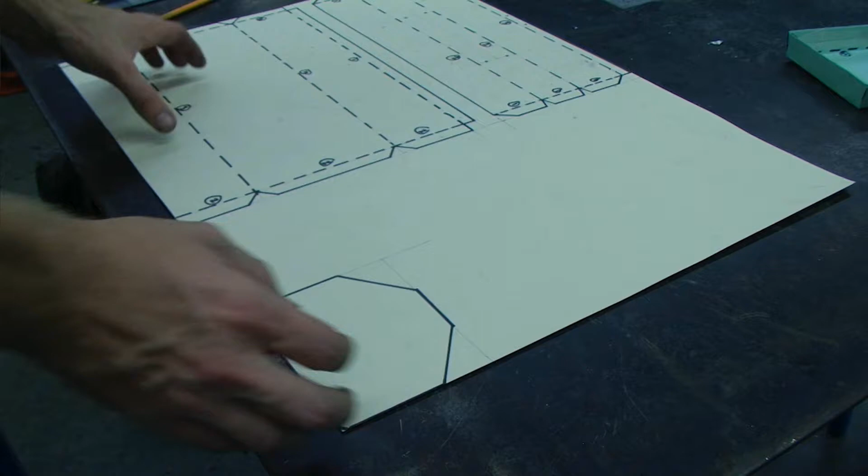In this video, we will be laying out all of the toolbox parts on paper.

If we take a look at the original drawing, we want to locate our overall dimensions for our box base first. My overall height is 10 3/4 inches, and my overall width is 1 foot 2.5 inches.

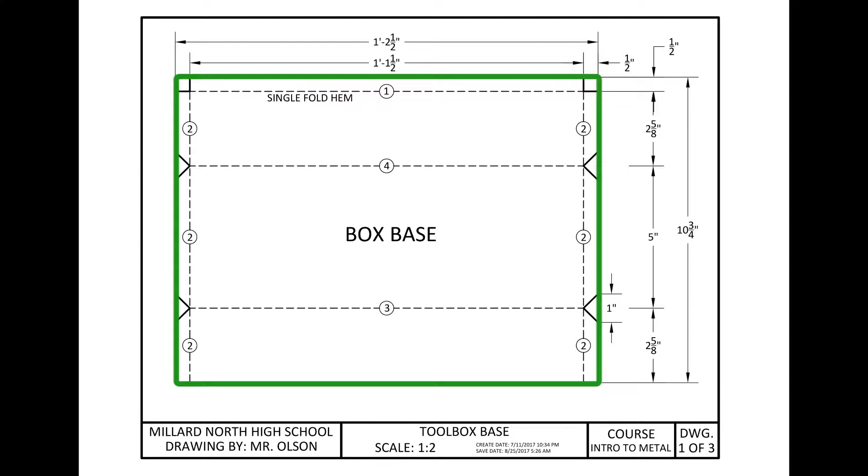So I'm going to start by creating some reference lines beginning at 1 foot 2.5 inches wide. I'm going to create one towards the bottom and another one towards the middle, then connect those together to create a reference line for the outside of my overall box.

Next, I'm going to create reference lines at 10 3/4 inches, which is the same measurement as our overall height for our toolbox, and connect those together also.

Now I'm just using pencil for this, and I'm using fairly light lines so I can go back and erase anything later.

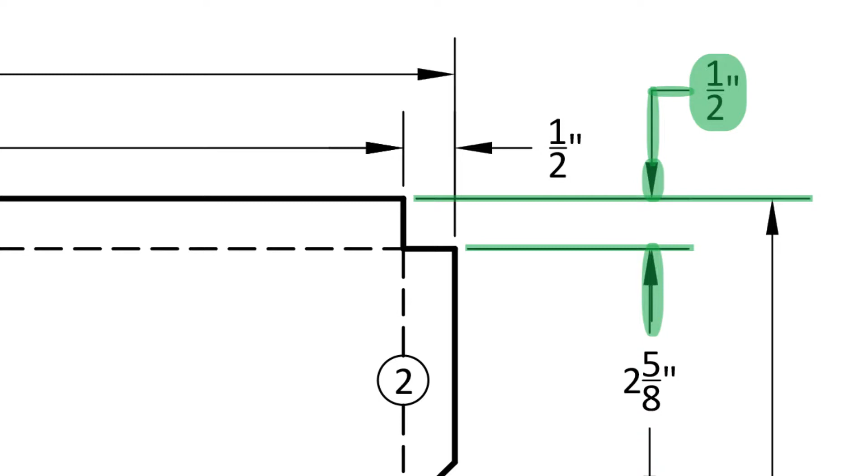The next line that I'm going to draw out is my first operational line. This is a dashed line, which means that there will be some type of operation performed on this line. It is 1/2 inch away from the top of our box base object.

So again, I'm going to place some reference points and then connect those together with a light pencil line.

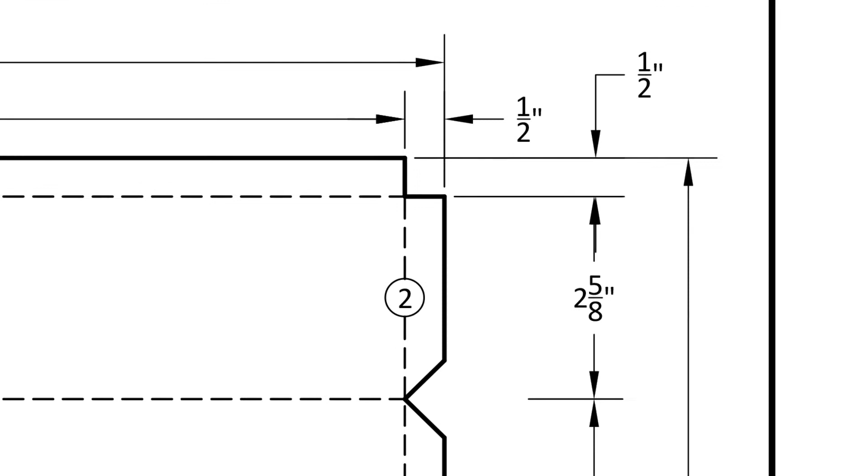After that, I'm going to be creating my number 2 operational line. This one is also 1/2 inch away from the edge of my object.

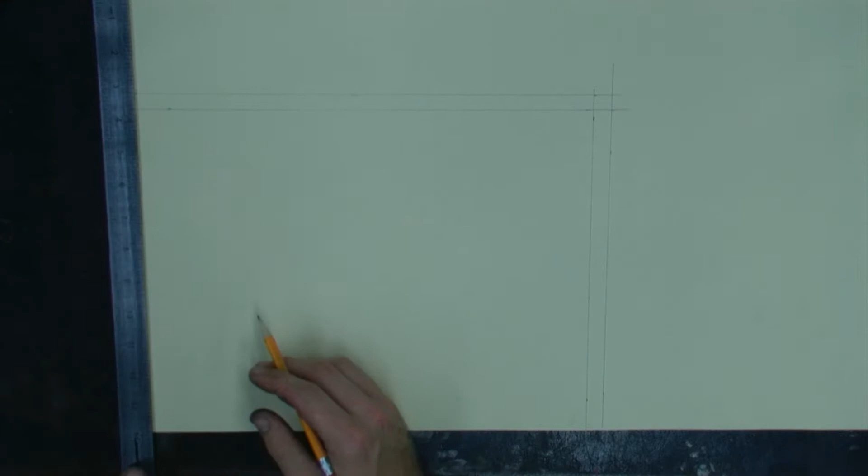After that, I'm going to lay out my number 3 operational line. This line is located 2 5/8 inches from the bottom of the drawing.

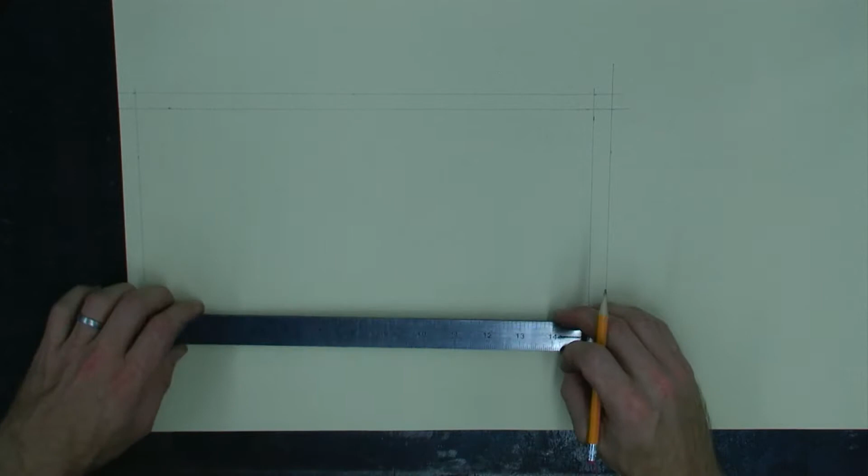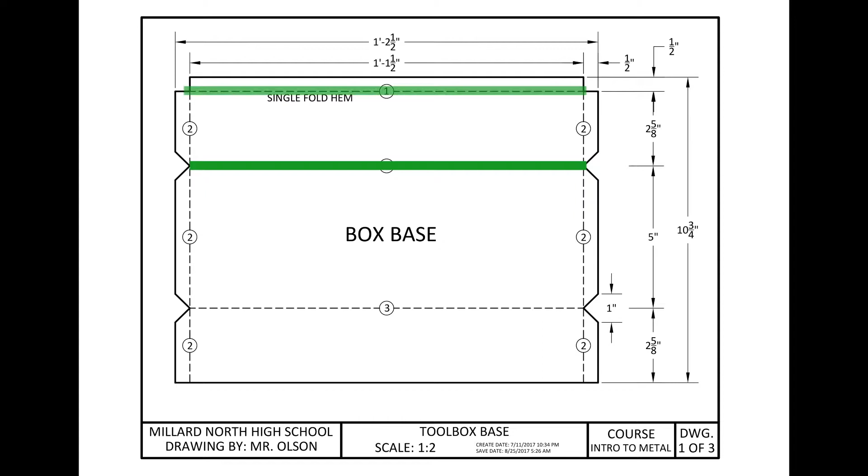Once that number 3 operational line has been laid out, I'm going to lay out my number 4 operational line. We can either base this line off of our number 3 line, and that distance is 5 inches away, or we could base this off of our number 1 line, which would be 2 5/8 inches away.

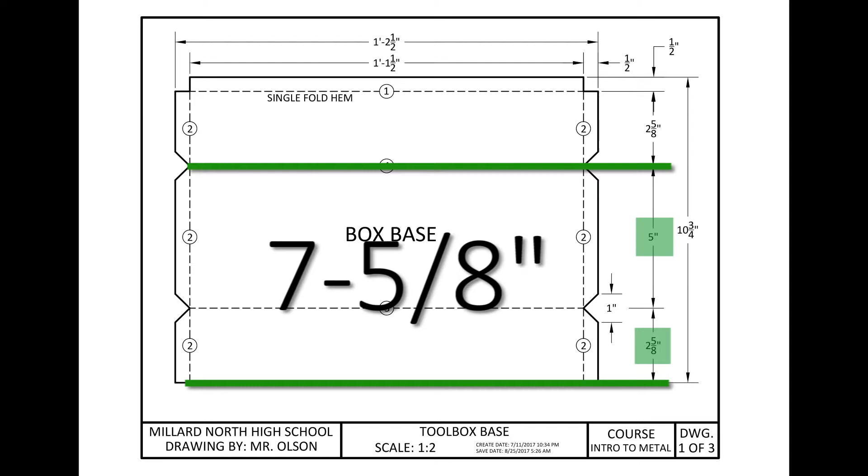So that I can be a little bit more accurate, I'm actually going to add together my 5 inch measurement and my 2 5/8 inch measurement from the bottom of my object. This will help me be a little bit more accurate rather than basing a measurement off of a previous line and hoping that previous line is drawn correctly. So by adding together these two measurements, I have 7 5/8, and that is referenced from the bottom edge of our drawing.

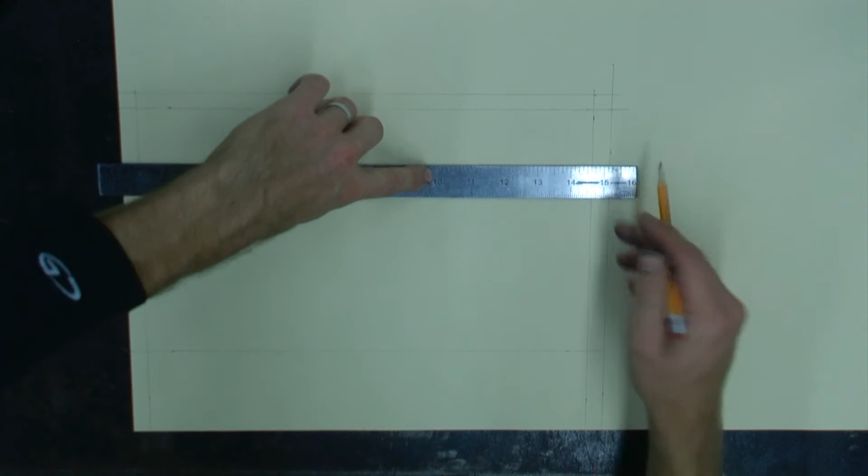And we can then go back and verify our other measurements that they are correct.

After that, I'm going to lay out my small notches on the side of the drawing. I can see that on my original drawing, the overall size of this notch is 1 inch.

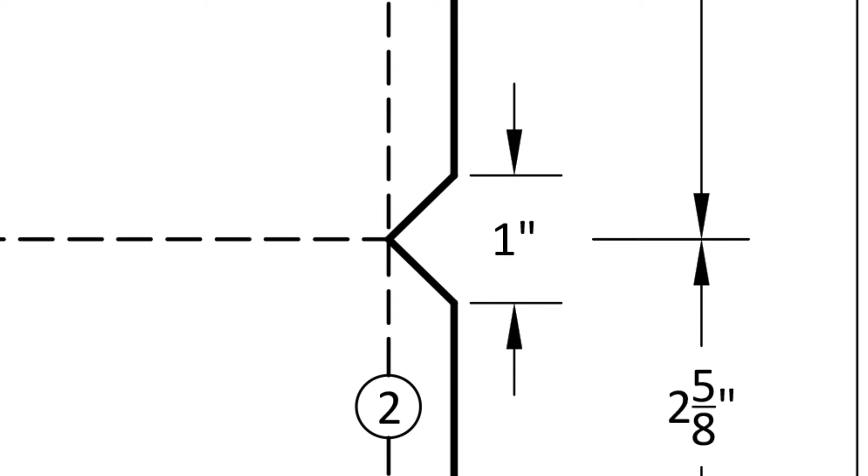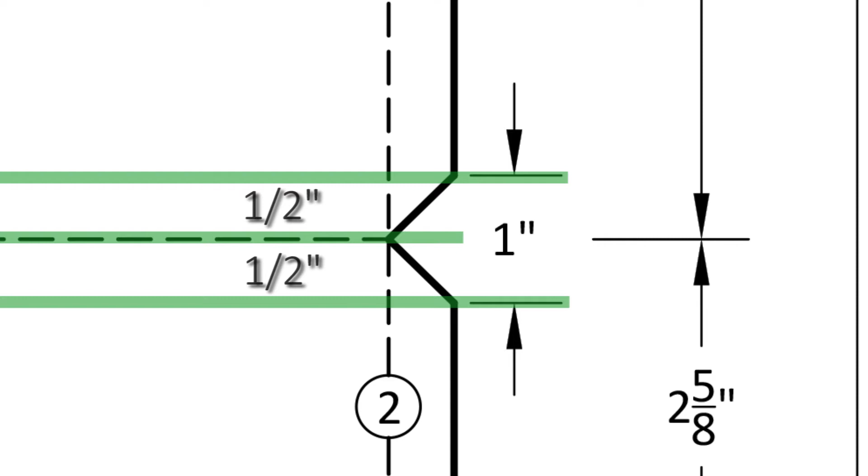Given that I have already drawn this number 3 operational reference line, that line bisects this 1 inch dimension. So I can take that reference line and offset it 1/2 inch on each side, and that will give me my 1 inch opening.

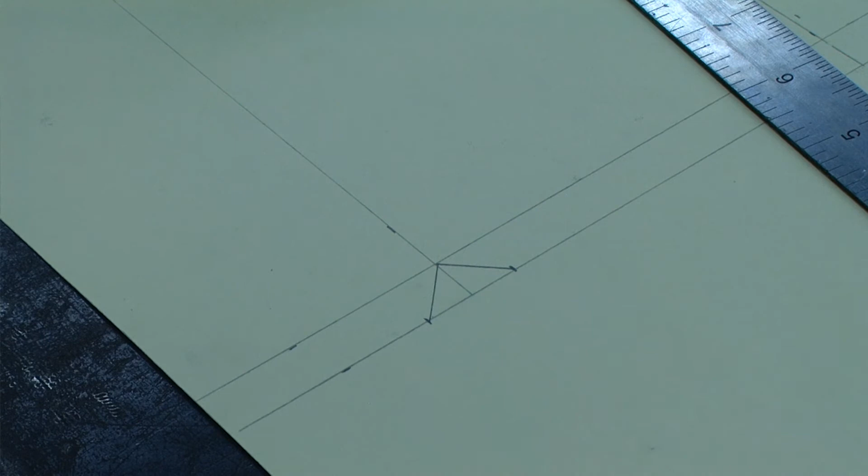And I'm going to place a few reference points and then connect those together, and I'm going to continue that for the other little notched areas.

We can then go through and darken in all of our object lines and create dashed lines for all of our operational lines, and then identify each of those operational lines.